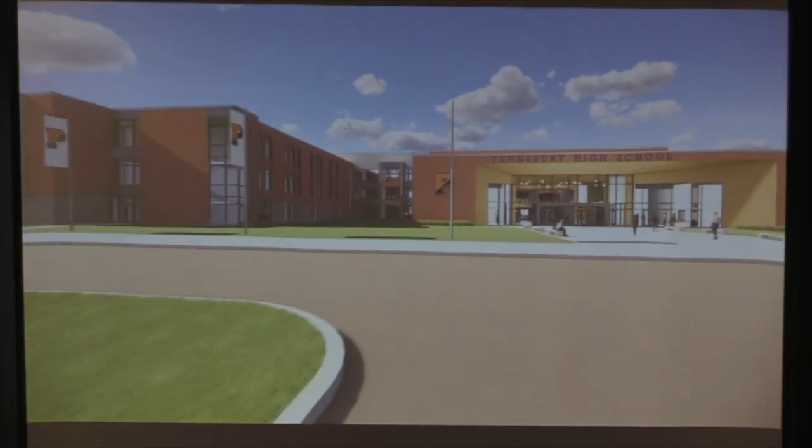What does it mean to enter a space? What does it mean to be walking into a brand new building that will be the cornerstone of education for your students, for your teachers, and for this community? We understand, we've worked here in the past, we understand how tight-knit this multi-generational community is, and this building is going to be a cornerstone to your community. So we understand the importance of those things.

Tonight, my team and I, we're going to share a lot of different comments, a lot of different areas and aspects of this building. All of us make up sustainability experts, interior designers, architects, engineers, code specialists, so we represent just a small portion of a much, much larger group.

By far, the brains of this operation is Thaddeus, who is a Pennsbury grad. So any of the tough questions that anybody may have, we'll certainly go to him, and he's going to talk in a moment about some spaces that he feels are pretty important in the building.

Quickly about us, we are a K-12 firm and do a lot of work in Pennsylvania and the surrounding area. Between Pennsbury and our office, which is in Hatfield, we have a lot of projects, a lot of different places where you can go and visit. We have a lot of great clients and community partners that we've worked with over and over again.

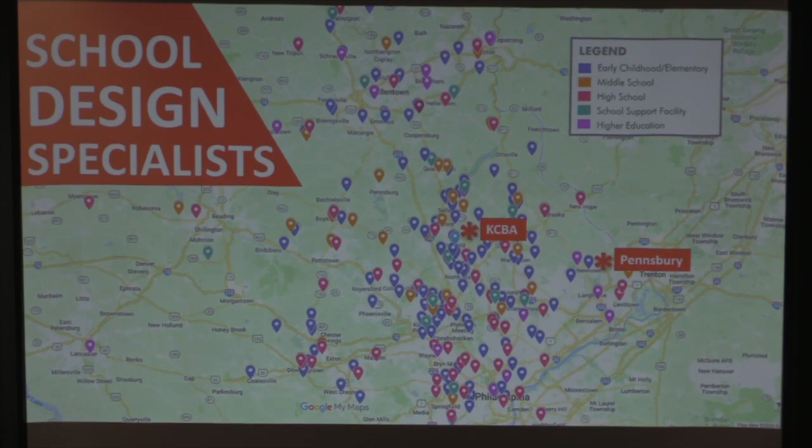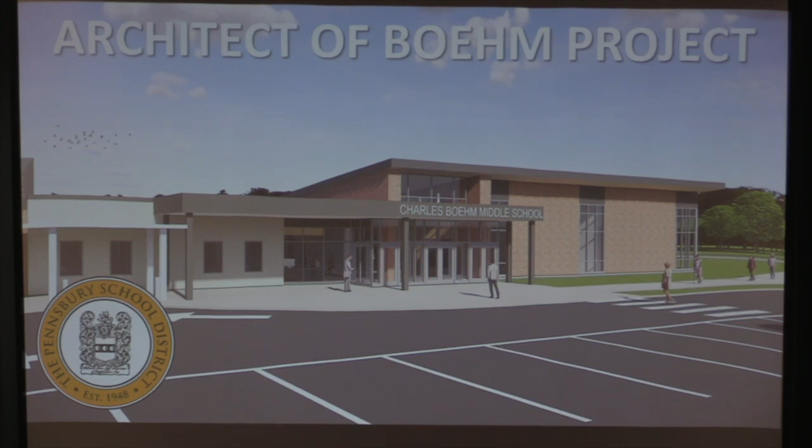But certainly, currently, our favorite project that we're working on is the Boehm Middle School renovation. Very exciting project that we teamed with the district over 3 years ago now, and we're excited for this project to be wrapping up next summer.

When we sat down with our team and said, all right, we have all these great notes, and we had all these great interviews and conversations with members of your team and your community, we said, all right, here's all these things that popped into our head. So we kind of created this board, and we just had all kinds of different thoughts and ideas and challenges, always coming back to, well, that would be great, but what is possible? How does that work? How would that be created?

So we kind of tried to drum all of this down into 5 real core areas of our design. The very first part of that is talking about a large building with a personal experience. We're talking about a big building, 500,000 square feet, 2,800 plus kids in this building. So how do we create something that is big enough to support all of those things, but small enough and personal enough to not overwhelm its visitors?

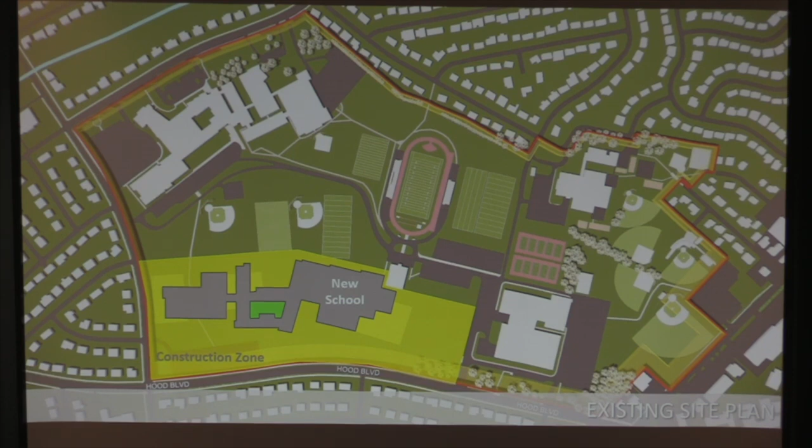So quick little study of the site. You can see where we are here in the east building and the west building on the side. The construction zone, as you can imagine, is going to be pretty large, and a building at about that size sits along Hood Boulevard, and at about that direction, kind of to the northern part of the site.

When we start to look at how the site is kind of placed together and all of the things that would be part of this project, first and foremost, one building, one new high school, not 2 buildings or 3 buildings that then were merged into 2, one new building, right? So that kind of makes a lot of sense, easy to think about. A separate bus loop and parking lot loop right by the front door, so all of that parking, every student is coming through one singular secured front door.

It's not spread out all over the place. There's not 10 spots there and 3 spots there. Majority of that parking happens in the beginning, or right in the heart and front entry of the building.

An athletic entrance and parking lot separate from that area of the building, so that any of the after-school activities, all of your sports nights, and maybe a prom, things like that are happening, that can all happen at its own special entrance.

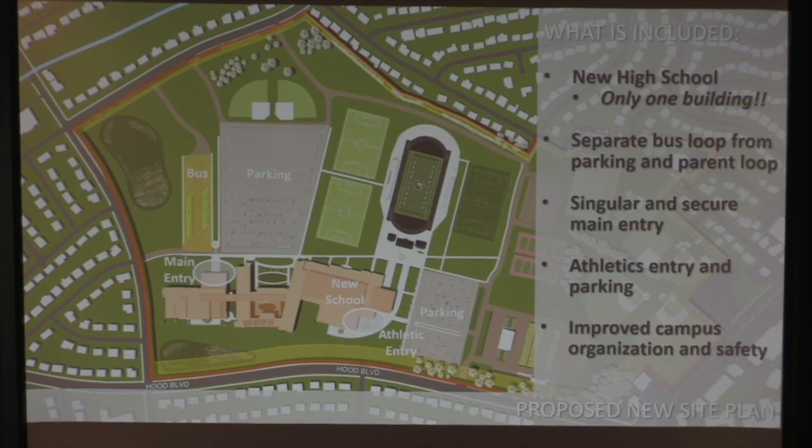What we're doing here is improving the campus organization and its safety. With buildings spread out across campus, with different kinds of parking in different areas, there's a lot of ways in this current site that we feel we can organize things and make the site itself certainly a lot safer.

So we've organized this large building into 3 sections. On the left, you've got administration and performing arts. You have a core academic area in the middle where most of our classrooms and labs and things are. And on the right, we have athletics and special events. We've tried to organize the main larger components of what you'd see in a typical high school within these three components, and then link them with what we're calling the Pennsbury path.

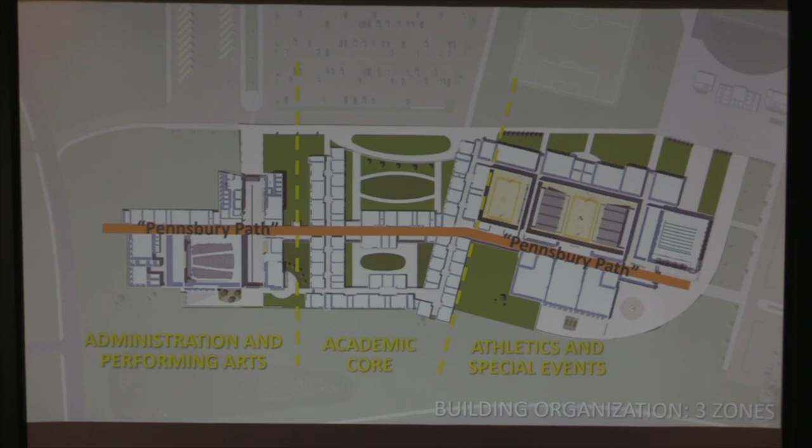We're going to talk a lot about the Pennsbury path. Everybody kind of celebrates that now as that half-mile-ish walk from one building to the other, and that's kind of nice, but this one will be inside, not in the cold or in the rain. So organizing these three elements along that path, trying to celebrate a little bit of the history and the things we like about the site now, but doing so in a much more efficient and certainly safer way.

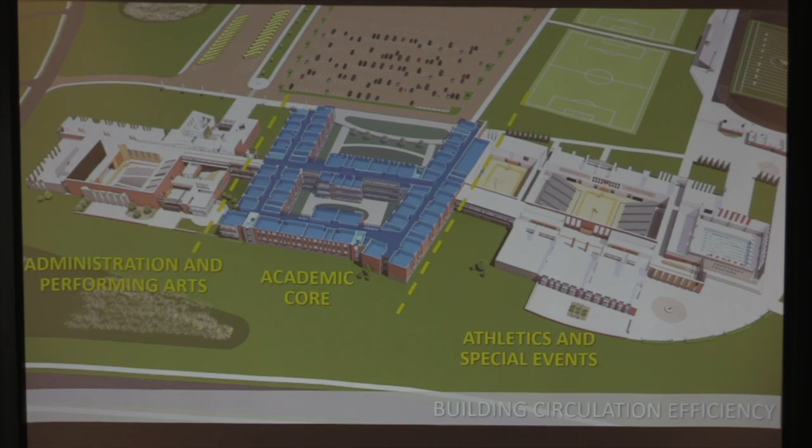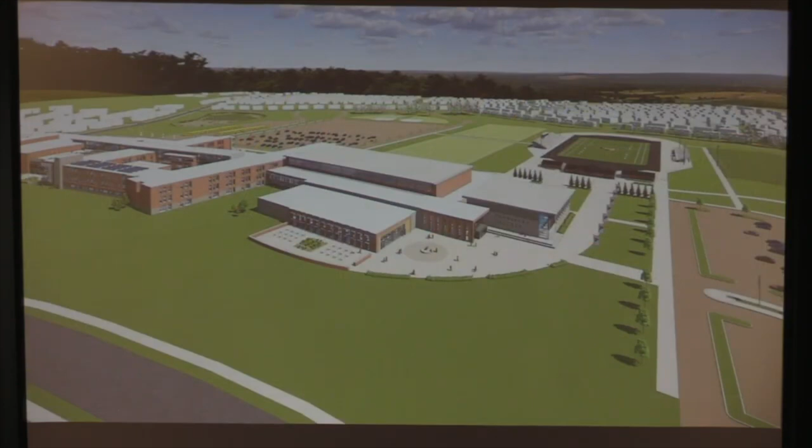So if you look at this area in the middle in blue, that's the area of academic space. One important thing is, if 60% of a kid's day is going to be in classes and labs and things like that, we wanted all of that to be in the center. Then for the other 20% of the day you may be in the arts wing, you don't have to go that far, or 20% the other way to the athletic area, you don't have to go that far. The academic core of that building, 3 stories stacked on top of one another, very efficient, and very centrally located, allows kids to quickly move from one side of the building to the other.

So what does that look like visually? Again, a huge building. From the outside, here's athletics - looks like athletics, a gym and a pool and the cafeteria. Then we get to that center component. If we're driving down Hood Boulevard, that's the academic core. And as we get to the left, performing arts spaces and things like that. So from the road, as people are driving by, it's not some big, huge tower. It's not some glassy, orangey box that looks like something out of Las Vegas. It's very much part of the context of the community, using traditional materials, but looks academic, and certainly something of pride for the district.

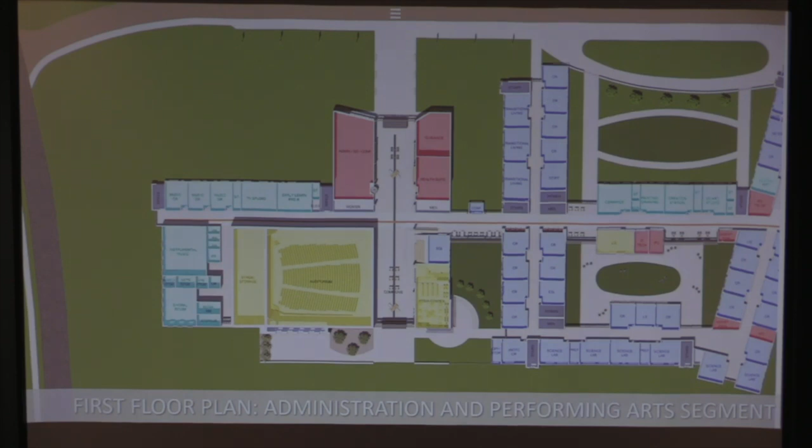So if we dive into those 3 pieces - and all of these buildings tonight are going to be pretty big - we're going to dive into the first piece I mentioned about administrative and performing arts, and what's included in those spaces. Again, I'll say this over and over, a singular front door, not 75 doors into different areas where kids can go in and somebody can go in there. One very clear and identifiable front door.

I happen to be on the Governor's School Safety Committee. I have an expertise in school safety. The first thing they tell you is have an identifiable front door, a singular place where security happens for visitors and students. So having that space is very, very important, right next to the administration area.

But then we have a learning commons. So every place in this building we're going to show has a lot of activity, a lot of areas and opportunities for learning. There's not just a lobby. You saw tonight, sitting out in front as we came in, the flags and the rifles and some of the band front were outside practicing.

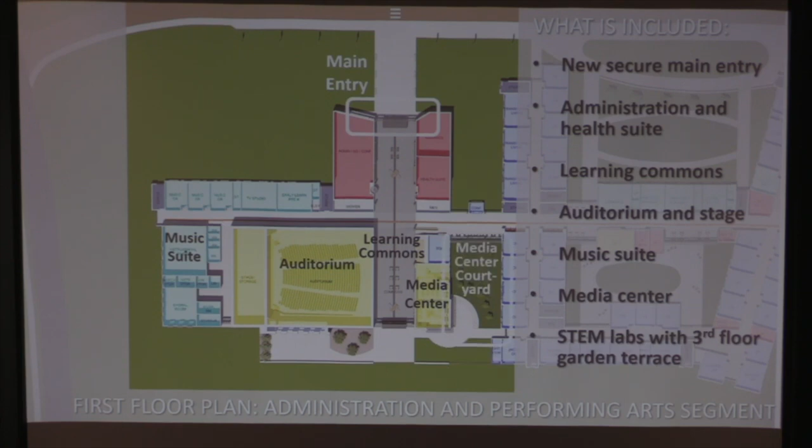That kind of space is what we want to see in those types of learning spaces: auditorium, music suite, media center. Again, a space we're going to talk about tonight—we don't call libraries anymore, we call them media centers. There's a lot of ideas of what that could be, and a lot of outdoor spaces near that as well. So you're going to see tonight a lot of spaces connecting the inside with the outside, again kind of talking about that Pennsbury path.

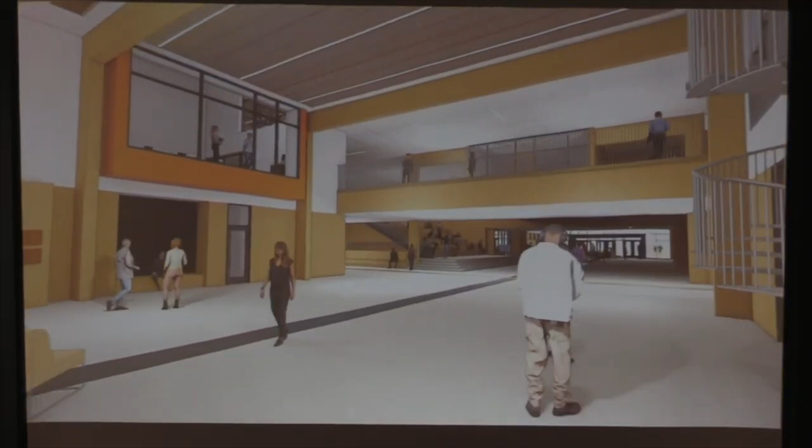It's nice to be outside, but you don't have to be outside—you don't have to cross a half mile to get from English class to social studies. So if we walk through that front door, how does that feel when we first come in? We want to be wowed. We want kids to be inspired, but it doesn't want to be overwhelming either. It wants to be an appropriate space where we can show off some Pennsbury pride, and have an area that's secure and have areas for academics throughout. All of these spaces are going to be very energized and full of educational opportunities.

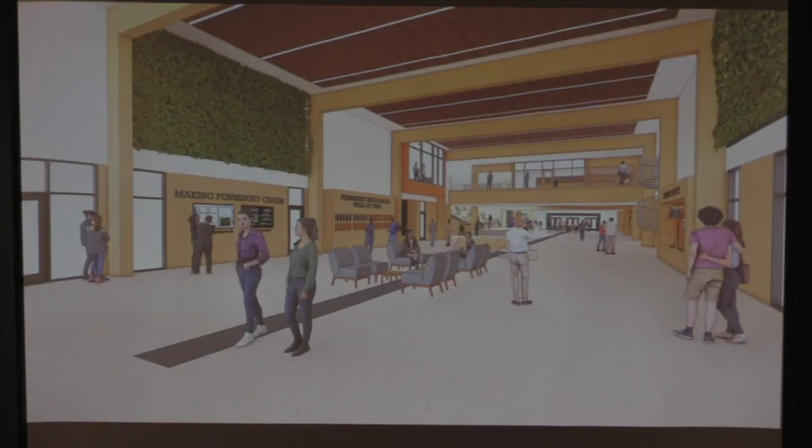As we walk through that first space, you're going to see areas about making Pennsbury green. Christine and Scott are going to talk about some sustainability initiatives coming up. We want to show off the history, some Hall of Fame honors, and things like that within Pennsbury as well. So we want to be able to show off community pride at the front door.

So that middle section, the academic section, is a 3-story core of classroom spaces—this is where all of your math, science, and things like that are stacked on top of one another. We have an art suite in the middle that has some outdoor space with a courtyard directly adjacent to that, so they can go outside for drawing, art, and painting. We have stacked science labs, 3 on all 3 floors, so that way all of that plumbing, exhaust, and the things that cost a lot of money in a science lab can be very efficiently stacked.

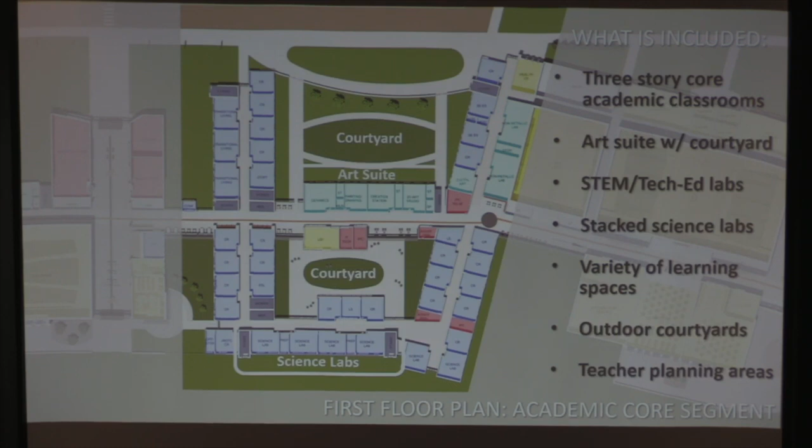And that science area has a courtyard, in this case enclosed by the building on all 4 sides, directly adjacent to it—we're going to show that off in a minute as well. So there's a variety of outdoor spaces and teacher planning areas as well. We're building the school for the kids, but the teachers are the ones who are going to be here for 20, 30, 40 years, so we want to make sure their spaces are adequate and inspirational too.

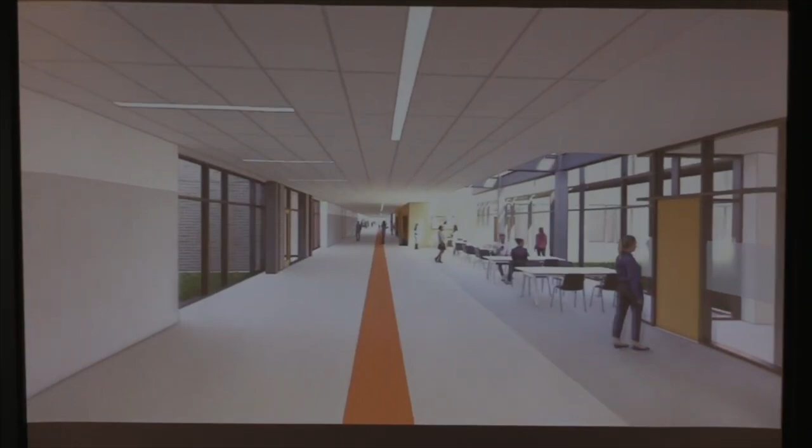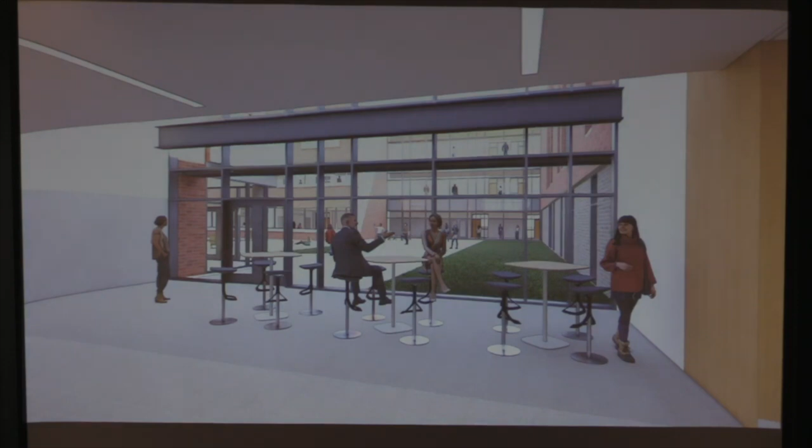So if we go back to that lobby and hang a left, we're going to head down the Pennsbury path, and what you're going to see consistently are areas of natural light, areas looking towards green spaces—both the courtyard spaces and closed courtyard spaces—or areas of light coming in from above. Areas where kids can pull over and have conversations with teachers, have conversations with other students. A lot of opportunities for curriculum and collaboration throughout that hallway.

Sometimes we want to be in a bright space, sometimes we don't. Sometimes we want to just kind of tuck away in a booth, so we're going to make sure we have those areas provided throughout the building. We're being very sensitive to anyone who may have sensitivity issues to light or things like that—we want to make sure the building is very inclusive to all of our students and teachers.

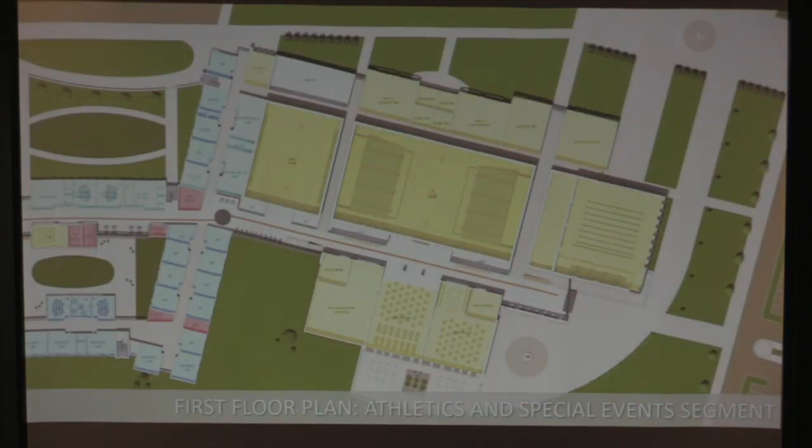And lastly, the athletic portion. This was a portion that was all the way on the right-hand side of that original plan—a 3,000 seat gymnasium, gymnasium, huge large space, and another gym right next to it for an aux gym. So you kind of have 3 gyms now, all at different sizes, but they're all sort of disconnected.

So let's create one singular athletic complex: a wrestling room, a weight room, a pool—an 8-lane pool, by the way, a little bit bigger than what you have now—and a cafeteria space, because that cafeteria space, as we're going to show, has a lot of opportunities to be more than just a cafeteria. So all of these spaces are kind of connected.

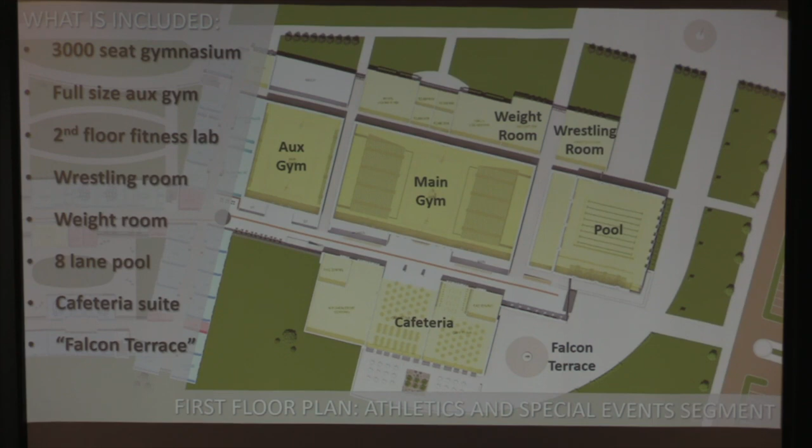I mentioned before the outdoor separate entrance into that area off of what we're calling the Falcon Terrace. It's an outdoor space where, on beautiful days like today, kids can go outside to eat and congregate. We think there's a great setting there for a few other attributes as well.

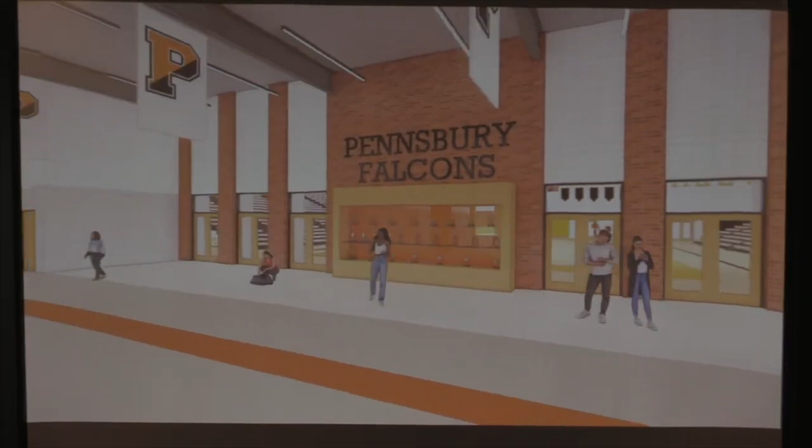Coming in from that Falcon Terrace, instead of the front door of the school, this is the front door of the athletic center. Coming down the hallway, you see the pool on one side, the cafeteria, and lots of trophy cases for all your awards and championships.

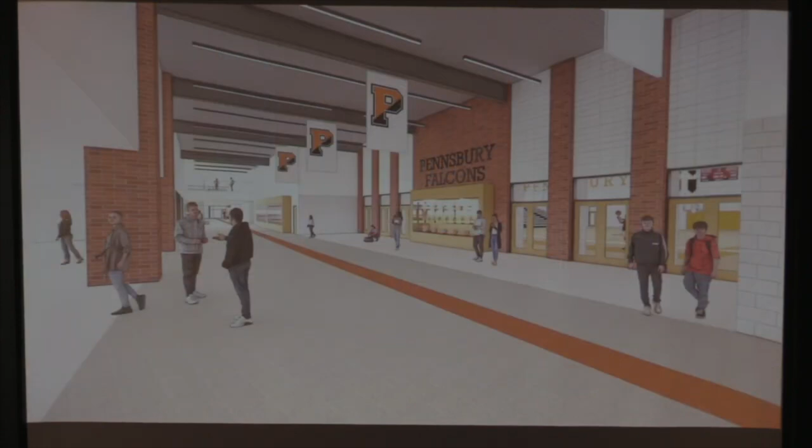These types of spaces are tremendous, especially the way the gym and cafeteria can be opened up to each other. So at halftime, everybody isn't just jammed into a hallway. You can open up that cafeteria and have refreshments there. It's a large gathering space, so let's utilize it throughout any public activity or athletic events.

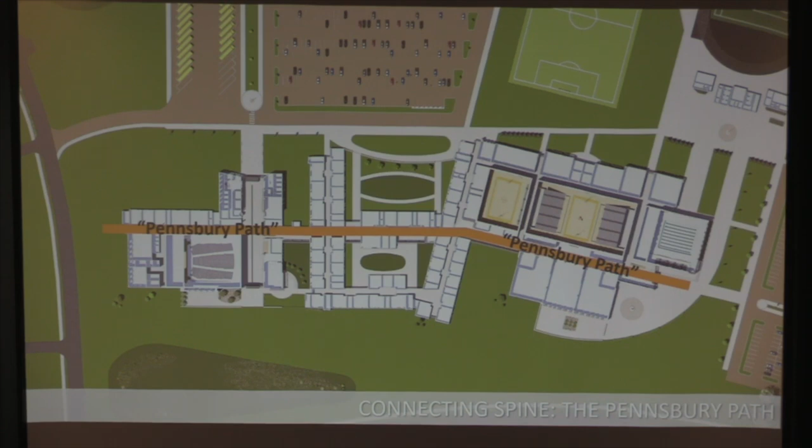I talked about the Pennsbury path, the way to link this large building together. Along that path are a lot of different educational spaces and teacher spaces. We want teacher-student interaction and student-student interaction, whether you're passing class or, with this design, allowing for block scheduling.

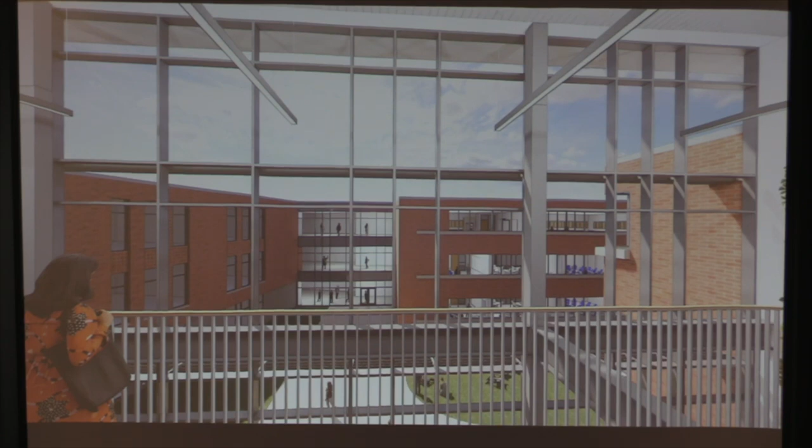Now students have a place for eating, socializing before school, after school, and during lunch resource hour. These types of spaces, on any of the three floors, always have links to natural light, with areas where kids can pull over, plus green spaces.

We love green walls, they're actually pretty fun. We just installed one at a science center at Bucks County Community College, and part of their senior class uses it for an assignment, caring for that wall. It's surprisingly low maintenance, but it helps create natural areas within the school.

So let's look at this as a dynamic platform for education. We know education is changing, and it's certainly changed since the 50s and 60s when these buildings were built. We want to make sure our building is ready for whatever changes may come.

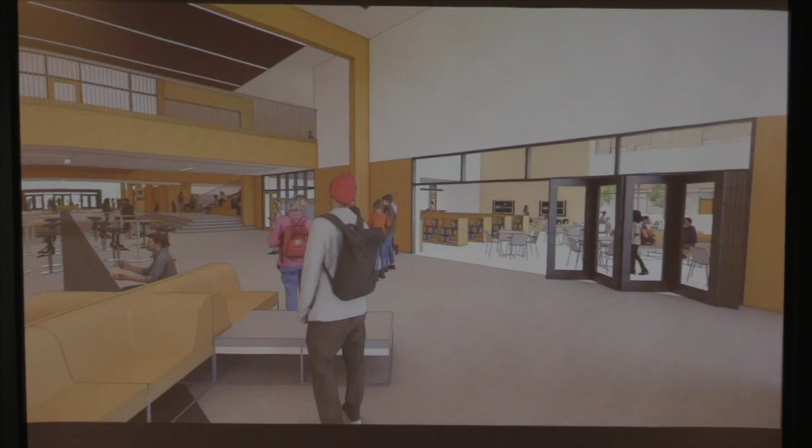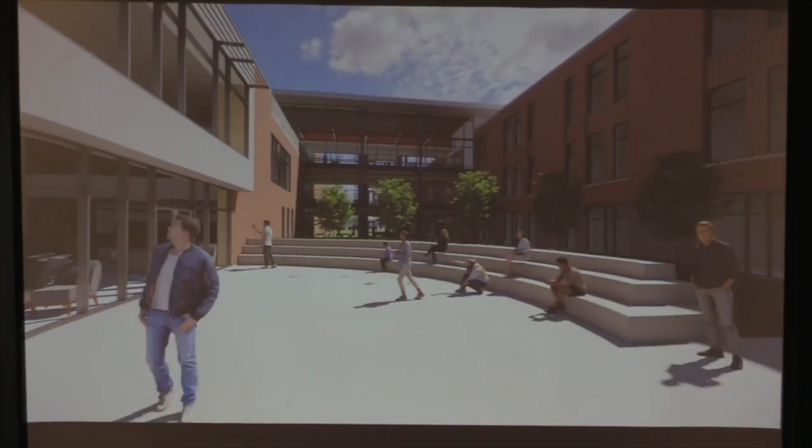Starting with the media center: 70 years ago this would have been the library, chock-a-block full of books. Now it's got some books, but it's really an area for kids to collaborate with students and teachers—take a book, take a laptop, sit and use information from the internet, and work as a team to collaborate together.

These types of outdoor spaces connected to those areas are just tremendous. On a beautiful day like today, I would love to go outside and sit in a space like that, connected to the media center.

Another space inside the building, just across from the auditorium, is what we call a learning stair. It gets you from the first floor to the second floor, but it's also a place for students to pause, charge a laptop, have a coffee in the morning, and meet with fellow students—making sure all these places are accessible to students and faculty alike.

So if there's a raised platform or anything involving physical accessibility, we want to make sure the building is inclusive and allows everyone to participate.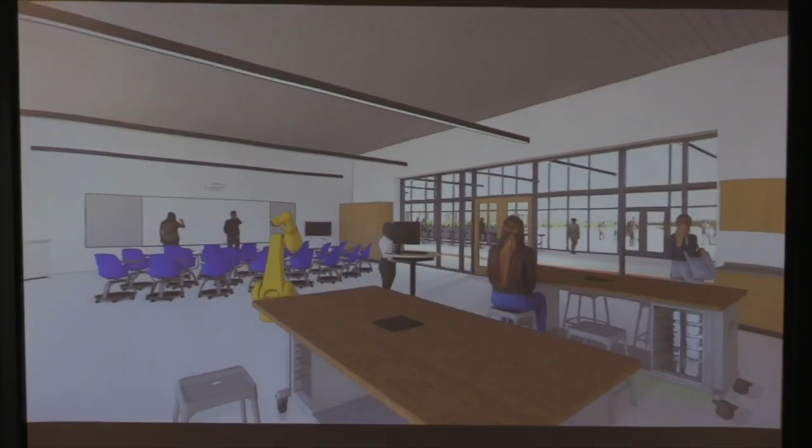Coming outside from that, I cross the third floor version of the Pennsbury path, and I'm outside into a large green-scape garden—an area for botany, earth science, and even growing vegetables in the summer and fall.

So again, another outdoor space secured, away from traffic, and an area for kids to have additional outdoor learning opportunities. This enclosed courtyard is one of the favorite spaces of students at Avon Grove High School or Lower Moreland High School, which we just opened a couple of weeks ago.

These spaces are tremendous for students to be able to come outside. We visited where they're eating there, there are hacky sack sessions going on in the corner, and other kids are reading in another area, bringing their STEM projects outside to work on, flying drones up through these spaces. We want kids to be able to be connected to the outside and provide those types of spaces and secure them.

So here's a view, kind of going from that inside courtyard space. We're going to go across the Pennsbury path on the first floor and wind up outside in that larger courtyard space across from the art room. So whether you're at one side of the building or the other, you have access to all of those things. There's a lot of variety of different courtyard spaces, some a little bit more enclosed than others. But again, we want to make sure we're connecting students visually to nature.

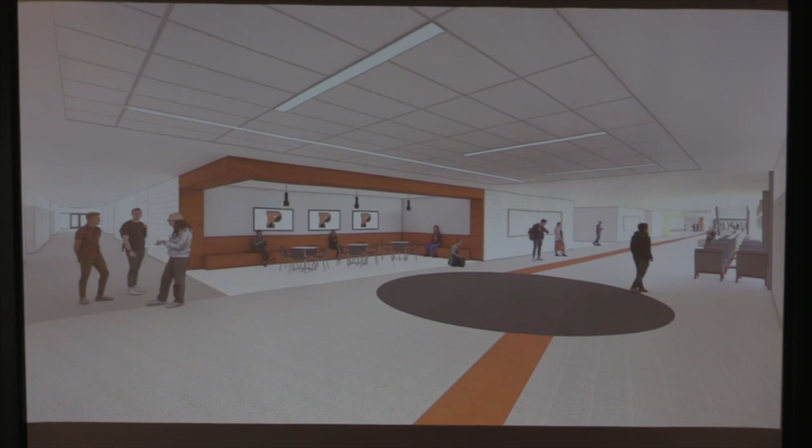So again, more images, as I mentioned before, time and time again, of natural light coming into these vibrant, more modern educational spaces. And as I mentioned, sometimes we might not want those big giant spaces, so there are other areas that can be tucked away for students that want a little bit more of a quieter space along that Pennsbury path as well.

So I'm going to turn things over to Christine and Scott. We're very lucky to have them on our team. They're from Revision, a nationally renowned sustainability company, fortunately housed right here in the Philadelphia area. We've worked with them for many, many years. The unique part of having them on our team is that regardless of whatever certification the school district may be looking for on this project, or maybe not, they're going to be a core part of our team and a huge part of our design initiative to make sure we're teaming with you guys on your Making Pennsbury Green pledge. Go ahead.

Thanks, Mike. So Revision's mission is to remove the barriers to building green and sustainable for those that are planning, designing, constructing, and operating buildings. It is not just about energy and water, it's about the students and the people occupying the building, their health and well-being. And of course, it's our responsibility to help the team with strategies that are cost-effective and appropriate to the project.

So it's not just guesswork how we come up with this. We use tools to help us make informed decisions. And in this example, we help the team choose the right amount of insulation that hits the sweet spot between cost effectiveness and optimization.

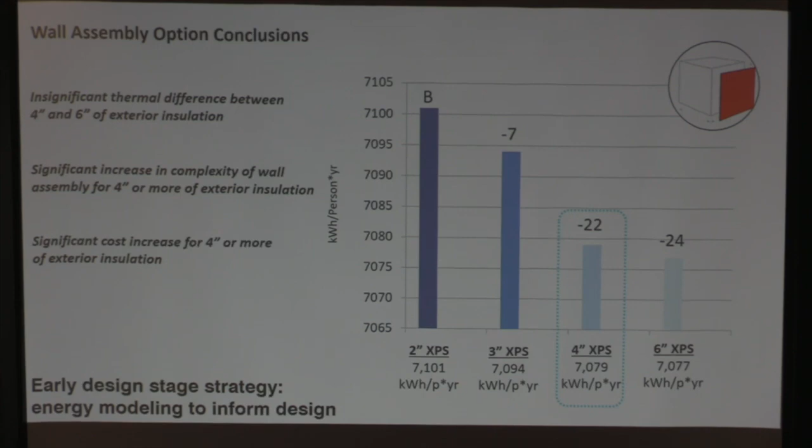So we get very technical, but possibilities really start with the vision. And this is one thing that we read through. We read through the Making Pennsbury Green plan and saw a bunch of things in here we liked. First, education for sustainability, your EFS curriculum. Why? Because it's holistic, it's not just focusing on one thing, it's very broad.

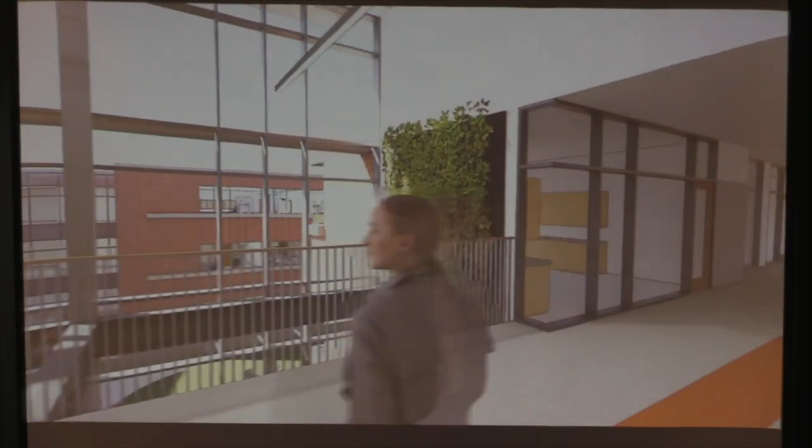Second thing we liked is incorporating energy and water conservation into the building, not just in a way that you can't see it, but in a way that you can see it, where you can use it as an educational tool. Wellness and healthy living, why? The students deserve it, so do the people who work in the building. It's an integral part, and these are things that excite us, and we look forward to integrating into your project.

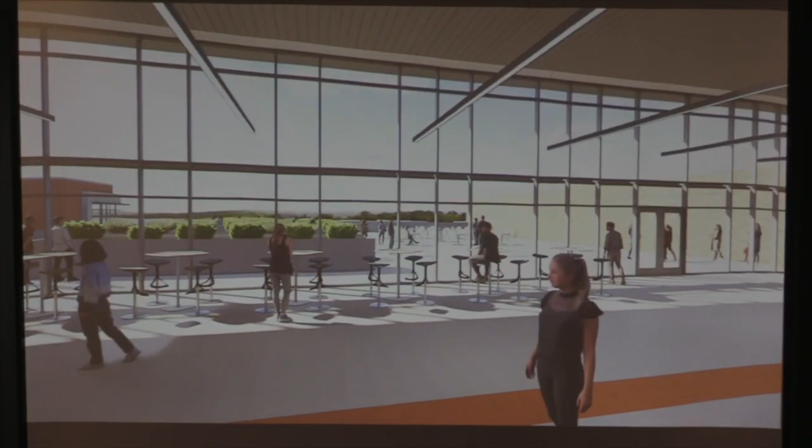Incorporating green and healthy spaces outside, which we heard a lot about in the very beginning, about how the students enjoy the pathway between the buildings and having that experience, we need to do that inside too. So our goal here is to basically use this concept, next slide. Oop, back one.

Can you go back one more? I may have gotten ahead of myself, thanks.

Using this concept of a path through the building, not just outside, but integrating sustainability features along this pathway in different nodes. Each node can have a different theme, a different teachable moment, but it's integrating sustainability transparently as you move through the space.

So you may have a strategy where you use solar panels, photovoltaics as we call them, but not on the roof where you can't see them. We want to put them down where the kids can see them, where people can see them.

So what do you do? You put that over large glass areas where you're using it for an additional benefit to shade the glass, which makes it even more cost effective.

Perhaps it's doing other things like using some of those interior elements to mimic natural systems. We grew up with nature, we evolved with nature, we are much healthier and learn much better when we have those natural elements built into our day and built into our buildings.

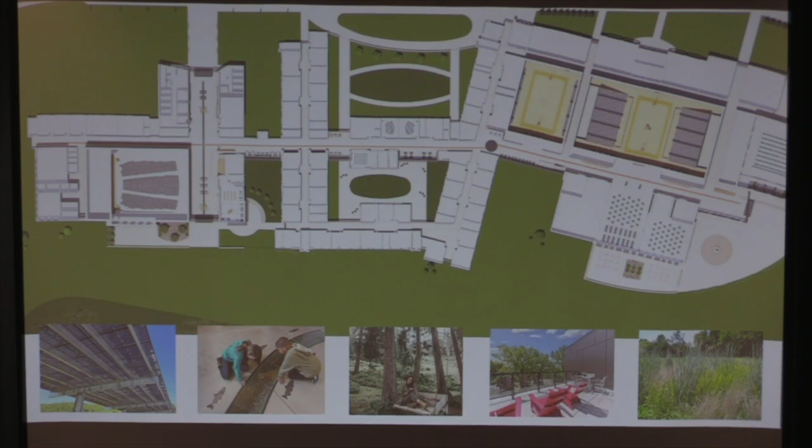As Mike explained a lot of these before, we're going to incorporate a lot of biophilic elements into the building, and we can't experience one without the other. So if you don't have daylight, you're not going to appreciate the darker spaces and vice versa.

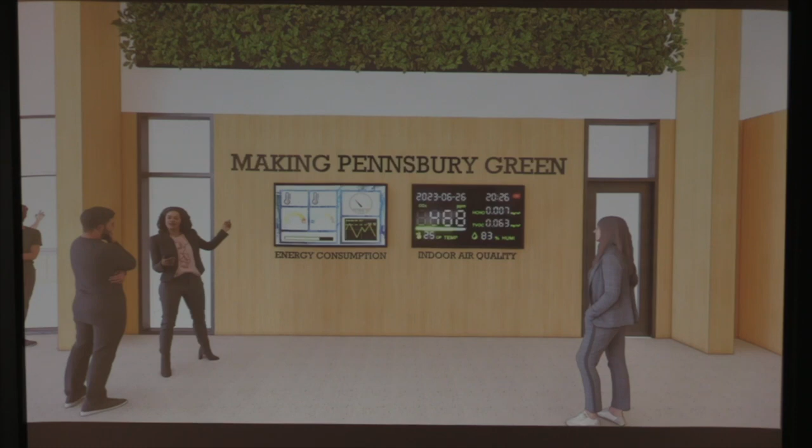I'm going to go on and Scott will talk about the next phase. One of the things that we've done very well is try to integrate learning opportunities and tools into the building as well.

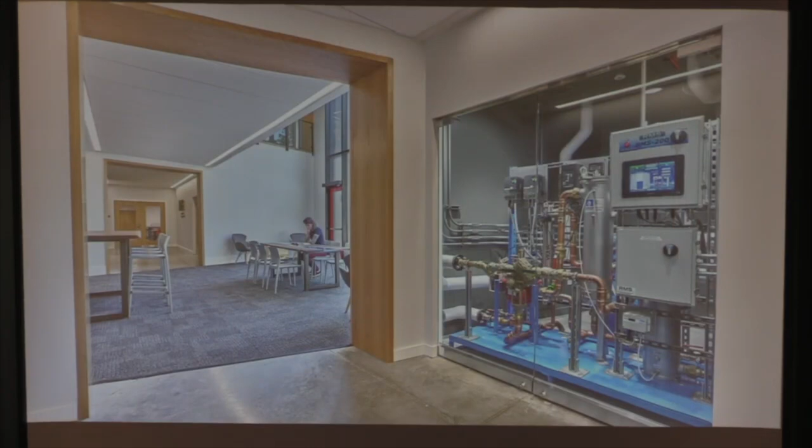Sometimes you have kind of a little learning space, and right next to that we're showing off the water that's being captured by rain leaders and being reused throughout the building.

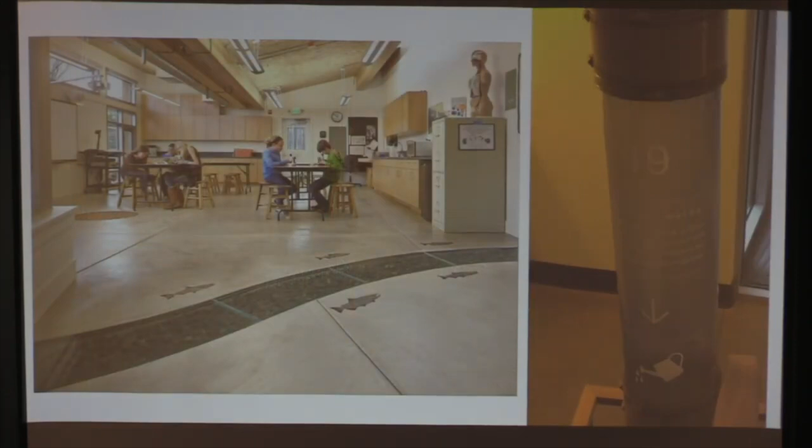This I always thought was cool, and I like the sound of it too. When it's raining, these rain leaders come down through the science spaces so kids can learn about rainwater and how all those things are captured. So kids are utilizing the building as a learning tool.

The key thing, very quickly to end on this, is to find the elements that have stacked benefits for you—that don't just solve one environmental problem, but help with social issues as well. We look at environmental solutions, social issues, and being fiscally responsible. The strategies we want to implement in the school stack to give benefits to all three.

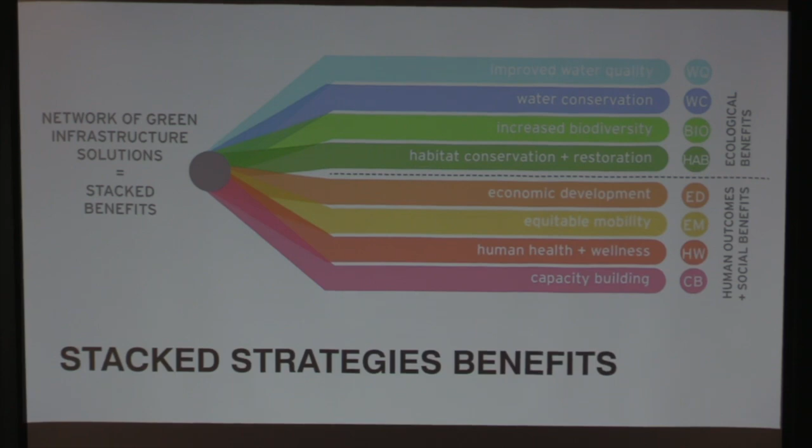So we're really excited to have them on as part of our team because that is very important to us and to our design.

So the fourth piece we're going to talk about is the state-of-the-art opportunity, or operations. This is going to be a big building, and you're going to need state-of-the-art people that can do this. As we stated, with the large construction zone, maintaining a safe environment during construction is going to be very important. So this is kind of the nuts and bolts part of the presentation.

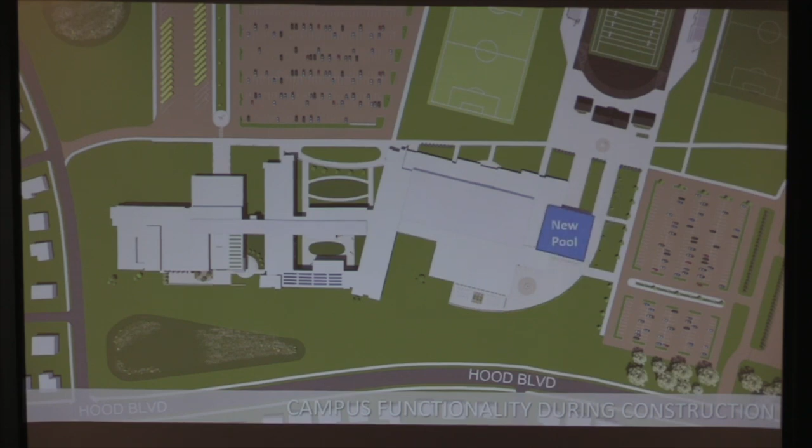We just did this recently at Lower Moreland, built a high school right next to the existing high school. We're going to talk about how the building can be built with the existing pool in place. So that's the existing pool; here comes the new pool, and when it's done, the old pool goes away. The building is going to make sure that all of those types of athletics can occur on the site during construction.

I mentioned before about controlled entry points—we have so many throughout the building. You have one in this school during school hours; this is where kids are coming, this is where visitors are coming. When the building breaks down into athletic time, yes, then we have an athletic center, but those areas are very well known and, again, identifiable.

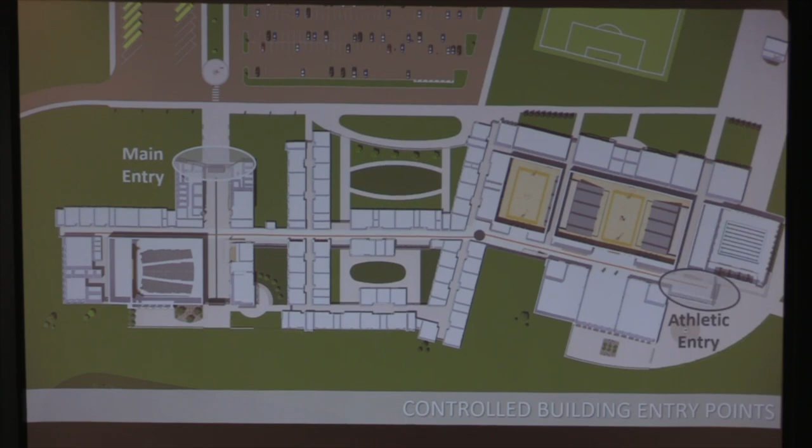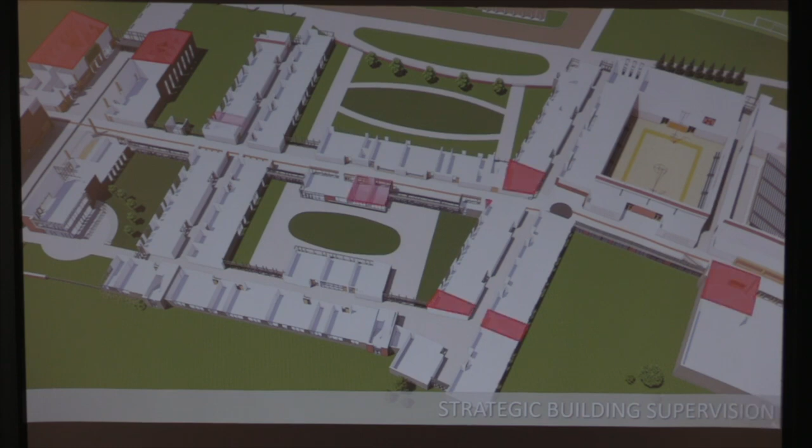As we look at supervision, we always joke that in that red area at the front, that's the principal's office. Well, no one ever gets in trouble right in front of the principal's office, so we want to make sure that we scatter the adults through the building as well.

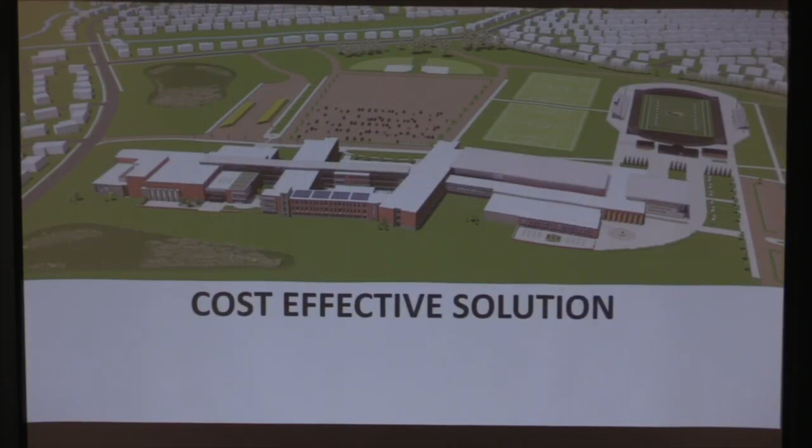One of the questions was, how could this building expand in the future? We could show that here. Right off one of those courtyards, we could build a 1, 2, or even 3-story addition right across the front there for additional space if needed.

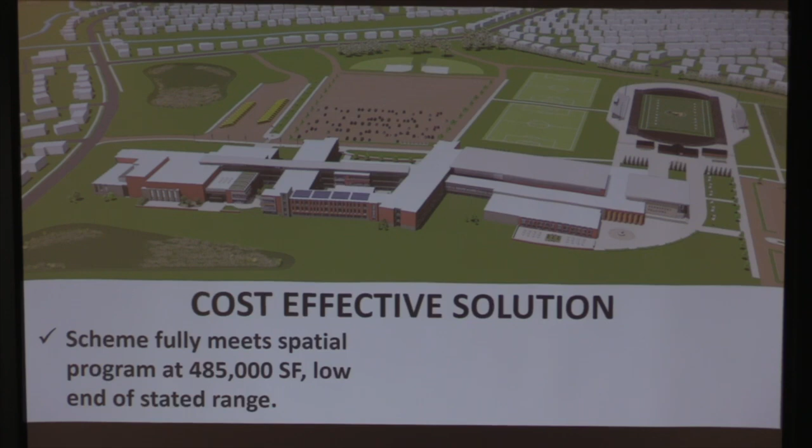One of the things we really like about this scheme, and understanding the community—I know I'm in a room full of taxpayers tonight—is keeping the size of this building down. Getting all of those inspirational spaces, but keeping the container as small as it can be. The way we save money on this project is building a smaller building. We can build it bigger, but that costs more, so let's make sure we're doing all of these things within the smallest container possible.

With our collaborative efforts, that's how we've been able to achieve these things time and time again in a lot of other districts. At Parkland School District, we worked with their administrators and superintendents, got everybody in a room, and asked, what are the goals of the project? Had teachers design their own spaces at Lower Moreland—said, what do you think you want?

Here again, somebody's mentioning natural light. We worked with kids, brought in furniture and models and stuff like that for them to work with. And there was community input at places like Southern Lehigh, where we had 3 different nights for 3 different topics—one night for education, one night for athletics, and one night for art. Getting that community involvement is very important as well.

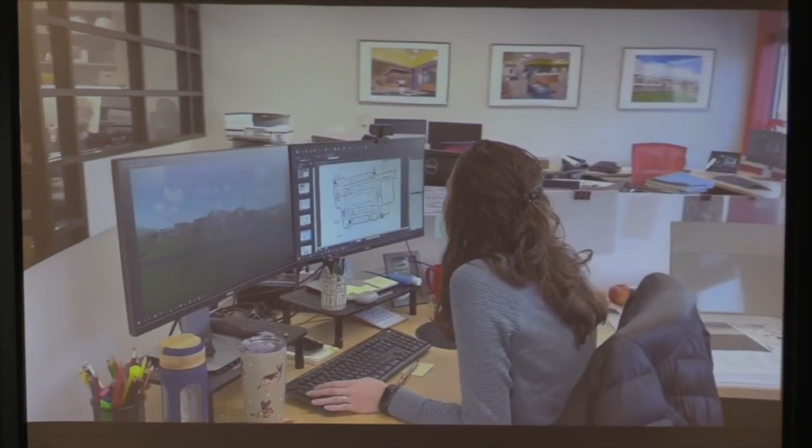Something that was fun with Lower Moreland, and a little embarrassing for me, there was a student that did an entire video documentary about the project over the 2 years of construction, came in, saw our office. I think she got an A. I hope she did.

But that was really important, and it was a great opportunity to link to the kids. So the 5th platform, and this is the exciting one, is the Center for Community. Again, understanding the community pride that this group has, we wanted to make sure we had a building that shared that pride, showed it off, and was a great stage for all of your tremendous events.

As I mentioned, when you first walk into the lobby, we have a wall of fame on one side, history areas on another, with opportunities for that throughout the building. From the 2nd floor, you can see down into that area, so we're crossing and seeing that throughout. There are areas maybe at the top of the learning stairs where we can have art displays. I love the idea of student art in public places—maybe a mural, or a photo of a mural that could be placed there, and certainly some other areas throughout the building.

Certainly you guys do a tremendous job now with your wall of honor, honoring servicemen and women who have fought and died for this country, who are part of you. Let's have that in a space where we could have ceremonies out in front of us. In this case, that's right out in front of the auditorium, by the auditorium terrace.

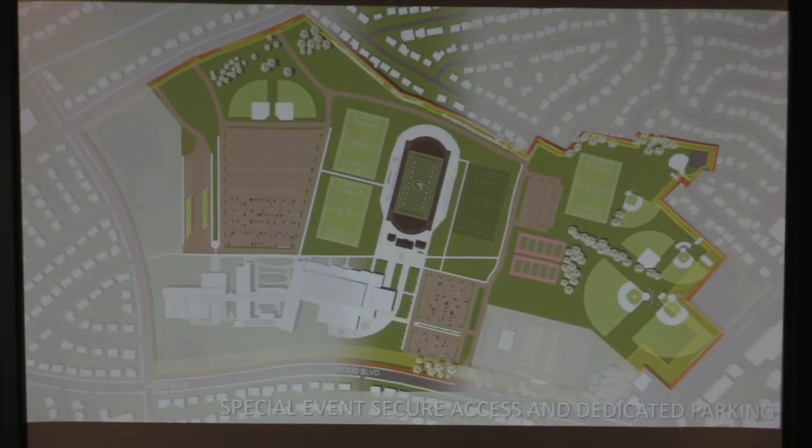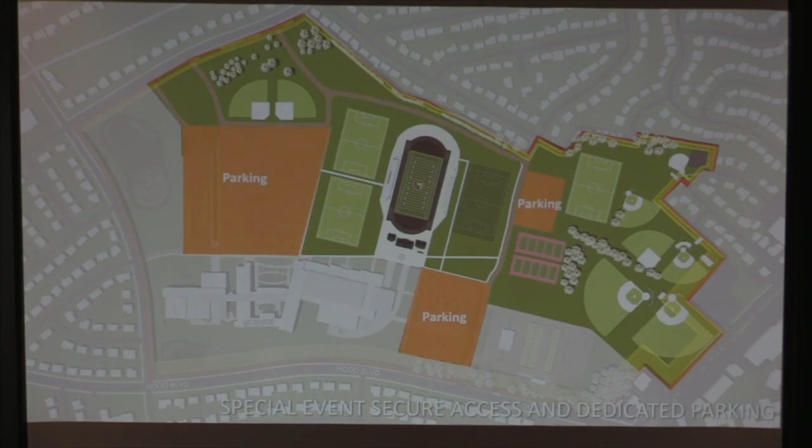So we can shut down that academic side. We have the auditorium and music suite sitting right behind that, and we're able to kind of isolate that part of the building from the rest.

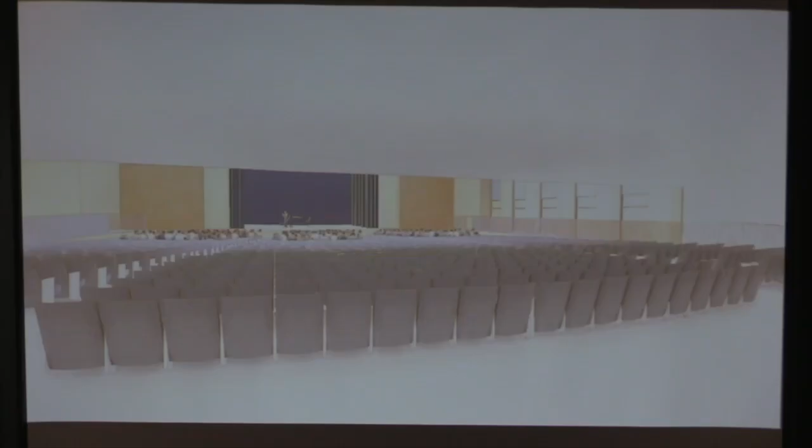This is one of my favorite videos, coming from that auditorium terrace, kind of coming around into that space. The wall of honor is right on the left, and we're coming into the auditorium space for hopefully a much more joyous and fun occasion than talking to a bunch of architects about building designs.

But these types of spaces, I think, are tremendous. Being able to have a space like this that could be multiple different things, including maybe a choir performance or something right out in front of the auditorium. These types of spaces are very flexible, with the ability to adapt over time.

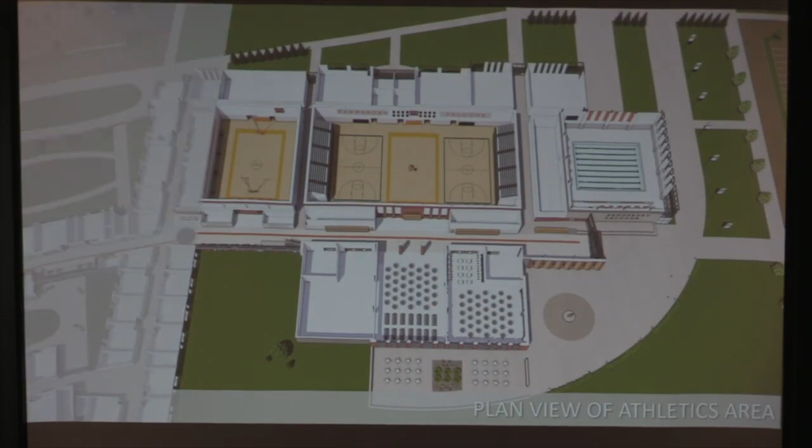This is a plan view of the athletic area, and our ability there as well to kind of shut down the rest of the building, having all of these athletic events, lockers, and support spaces all kind of in line and in tune with that.

So coming in from that side, collecting along here, we're kind of coming through that Falcon Terrace and into the main part of the building.

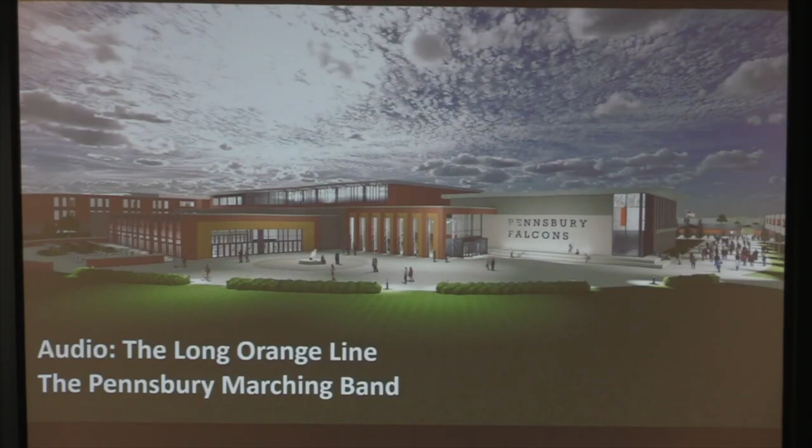So two big nights that we know are important at Pennsbury: one being the school night or sports night, and certainly the other being prom.

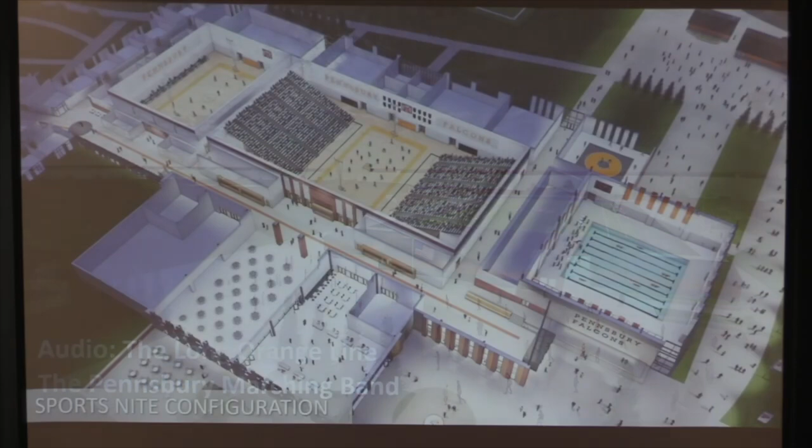So here, with music from your Pennsbury marching band, you can imagine the football team coming out, walking down, or the band marching out from the building and walking down over to your stadium, being able to be part of this area on sports night throughout.

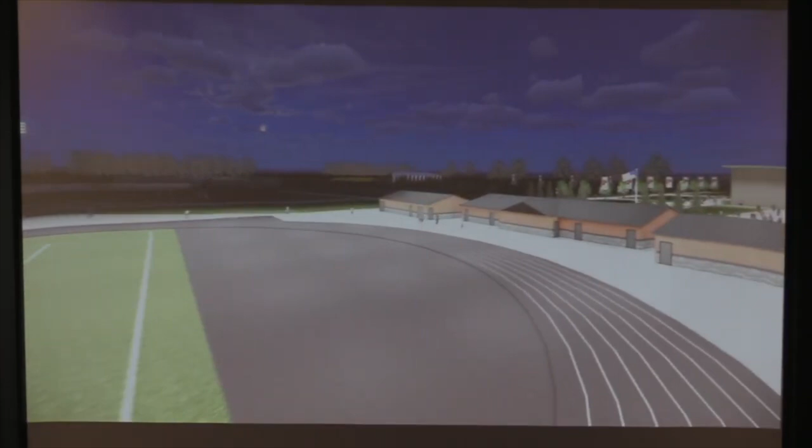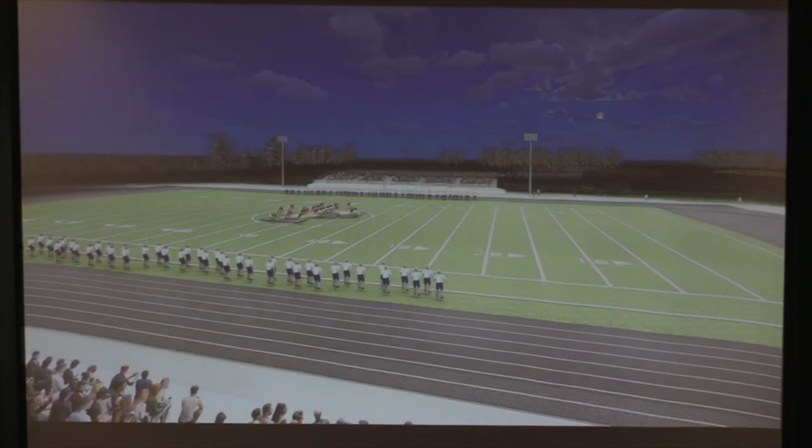You don't have just one little space. You've got multiple gyms, the pool, the outside space, the cafeteria, the stadium. Coming from the stadium back towards the building, passing here, you'll see the wrestling area, the pool, the gym. Areas like that are well connected between that whole athletic side of the building and the complex.

Here you can see sports night, and again, there's nothing like planning for prom night. So all the videos and all the research that we've seen for prom night, seeing that parade, we've kind of purposely thought, well, let's make this parade a little bit longer.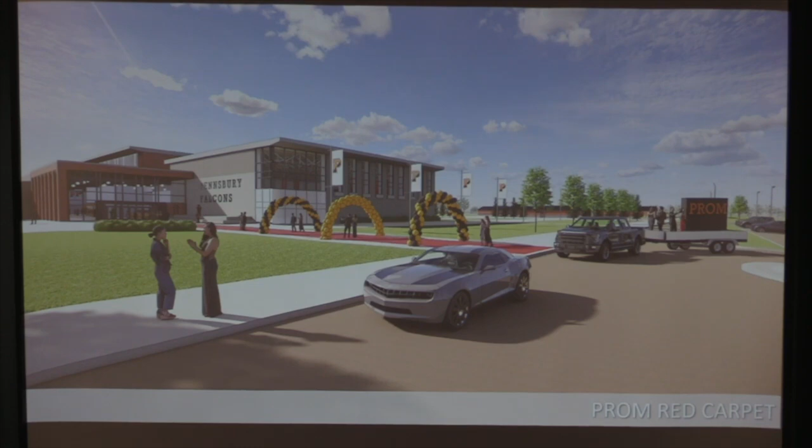Let's have kind of a snake view as we come through the parking lot area, as we come out and enter into the gym area, and have a space that is appropriate for prom night. Be able to have the Falcon Terrace, more than just the gym here at East, but a much larger space to house all of those things.

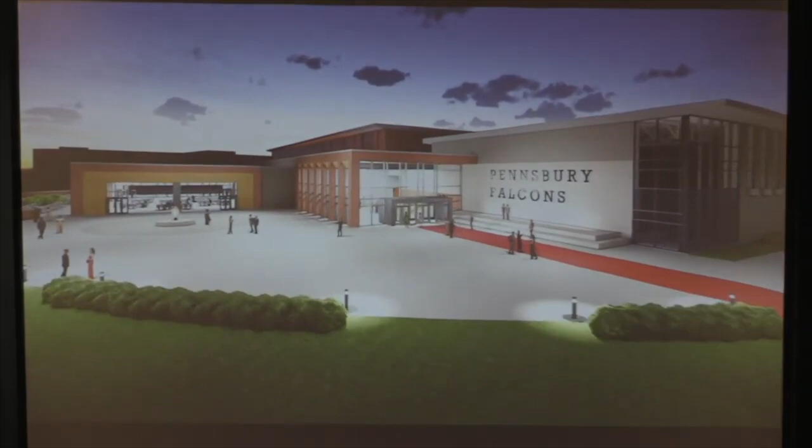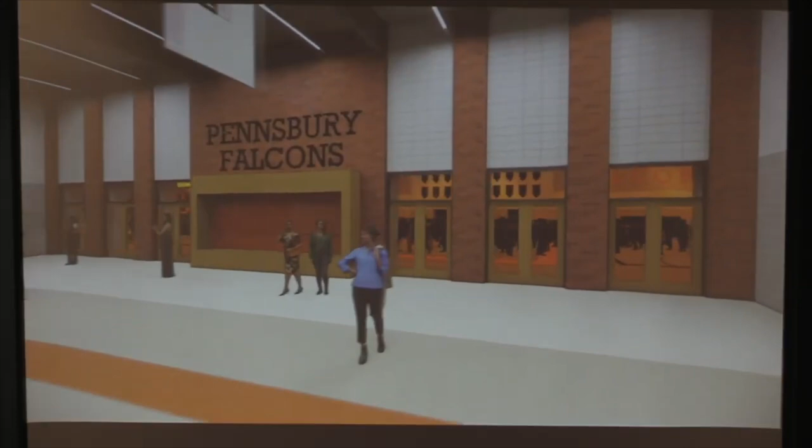So this place can be rocking, from the gym to the cafeteria, all of those types of spaces. If I'm coming in on prom night, let's not just isolate that in one space. Let's allow that entire area of the building to be part of that party, part of that thing that made this always known as the best prom ever. So let's set that setting for those areas.

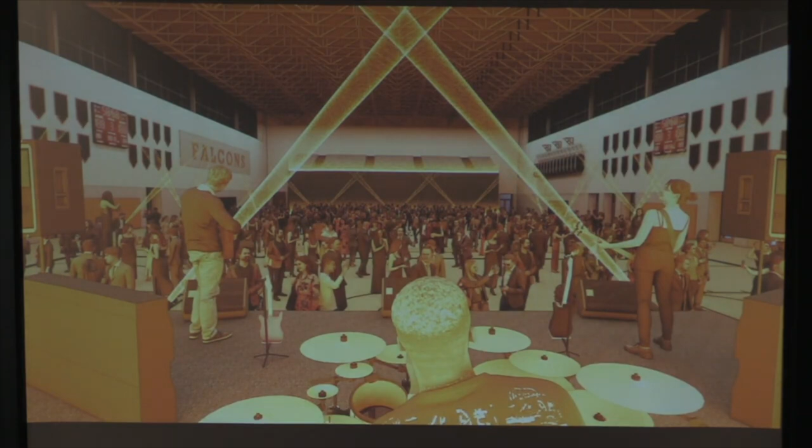You know, have a large gym space for this. We know you had John Mayer a bunch of years ago. Maybe you get Usher this year—he just had a big thing, but he's got some free time. And my daughter tells me SZA is the newest, greatest person, so maybe you can get her for the next gym. Whoever that person is, that venue is going to be much larger, much more adept to the setting it should be for your students at prom night.